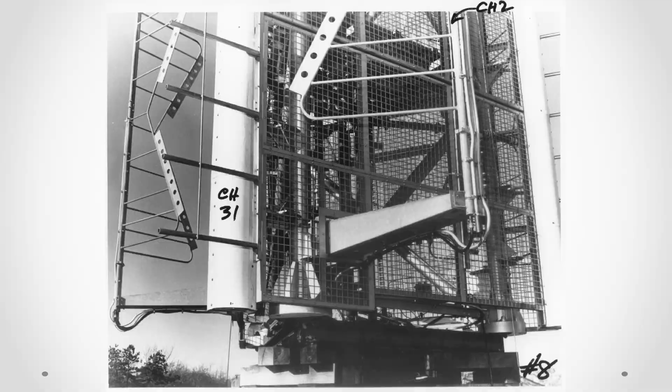These slides, some of them are courtesy of Alan Reese from the Port Authority and also Doug Long of WNJU from the original facility. So they're not in any specific order, other than lifting up a 20-yard container to the rooftop in the first shot here. This is just some of the antennas that were up there, to let you know what was there before and what we're adding now.

Just different pieces of the spire going up from the rooftop, which was an elevated rooftop, with all of the antennas in the left-hand photo. On the bottom there are two-way radio antennas. On the new facility, we have 3 rings wrapping around the top of the building that those antennas are on, as opposed to being on the flat deck of the building.

Again, just different sections of the superstructure being put up as it was built, lifting it from the street. The sections today were lifted the same way from the street with tower derricks and brought up to the rooftop and then set.

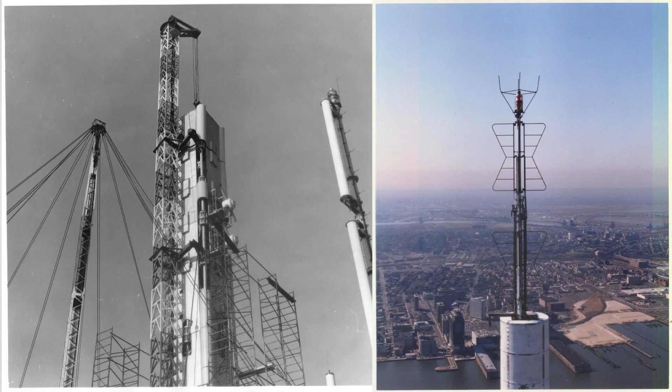The top then and the top now look a little different. Back then there was just a bow tie antenna for the VHF channels 4 and 5, and the rest were panels for the UHF antennas, with the FM in the middle.

There's your high anxiety shot looking down from the top. As I said earlier, the two-way radio antennas are all here on the roof.

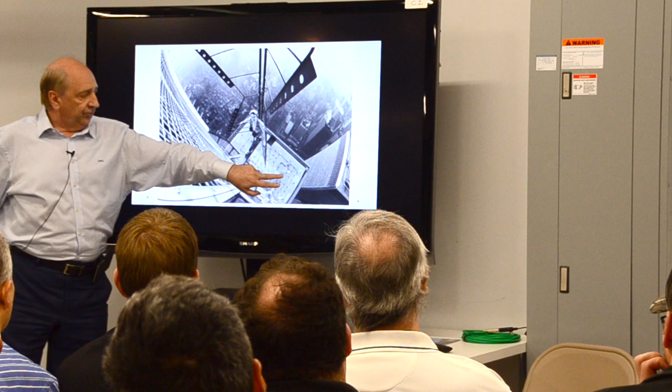This was a CNN ENG dish that I actually put in way back when, but this is what it looked like then.

Tower 2 is over here, and if you're walking around the Memorial Park where the two pools are, those were the actual footprints of Tower 1 and Tower 2. So we are just north of the original Tower 1 in this area now.

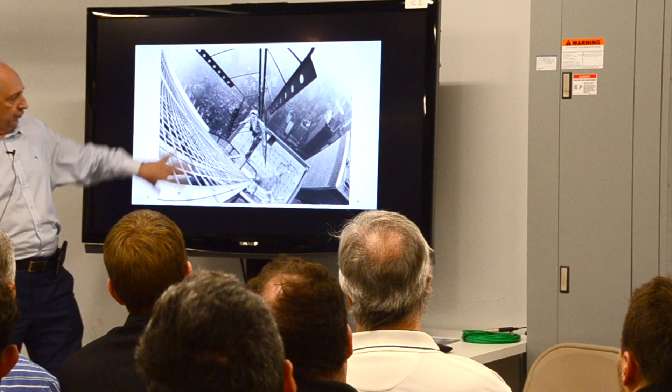And that's a picture you probably won't see today, of any riggers walking around in a tree climbing belt, not secured to anything, smoking a cigarette, and just hanging outside the building basically. The rules have changed a little bit in the last 40 years.

These I took right about 9 months before that day, 16 years ago. The ENG antennas and stuff wrapped the bottom of the spire, and the standby antennas were low, the FM was in the middle, and the primary antennas were up on the top. The ENG, the two-way, and the point-to-point microwave were all wrapped around the middle.

All of this ancillary service now is on the 3 rings, so if you look at the building from outside, you'll see those 3 rings. Unfortunately, with it being dark and late, and construction on the roof, we can't go up there, but you look at the pictures and you go, okay fine, that's nice, you've got these 3 little rings.

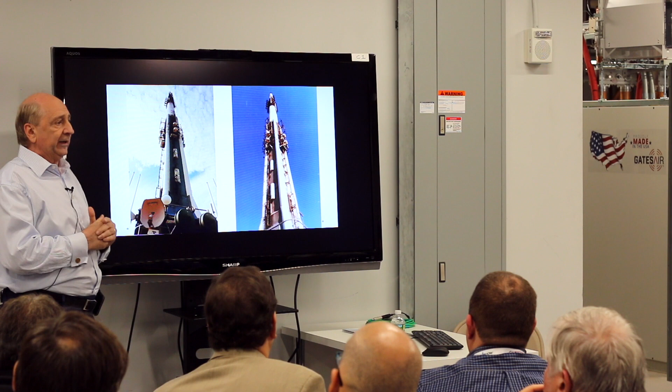Well, those 3 little rings are 750 tons of steel, sitting there on top of the rooftop of a building. So yes, it's a building, but still a building. And the new spire itself is 781 tons, also sitting on the rooftop of a building. So just put that in perspective when you look from the ground as to what you're seeing.

And that's what was left of the area, about 120 foot up the tower, after what happened. That was the hatchway, this was the RF safety shield, and that's what you climb through, getting up into the apertures.

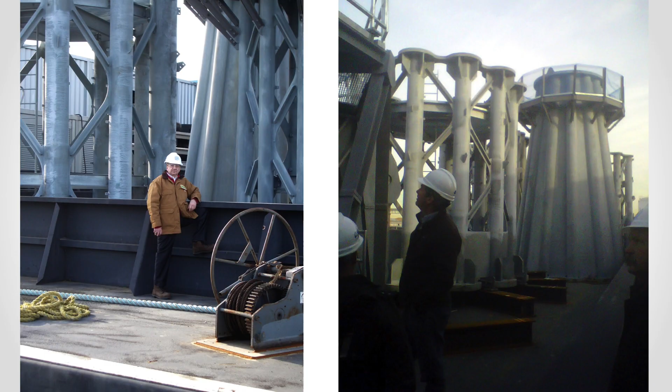So getting started down here, the tower sections, the bottom 9 sections were shipped from Canada by barge down the Erie Canal and down into the Hudson River.

They were then brought over by barge to the building. The top sections came by truck, and they were brought to the site.

So this is the property manager of One World Trade Center and myself on the barge in the laydown yard when they first arrived. Here they are coming across the river as they pass the Statue of Liberty from New Jersey, where they were anchored, and then subsequently coming towards the building.

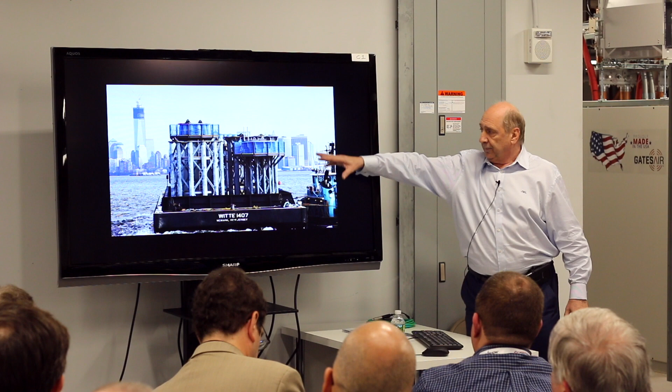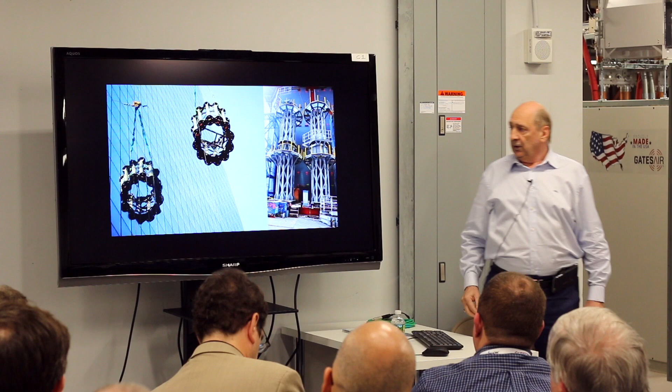As I said, these were brought up in pieces, one at a time, to the top, and then brought up and anchored. The upper sections were married, 2 sections on the ground, and then hoisted in pairs, because they were obviously considerably lighter than the lower sections, and they could handle picking them up.

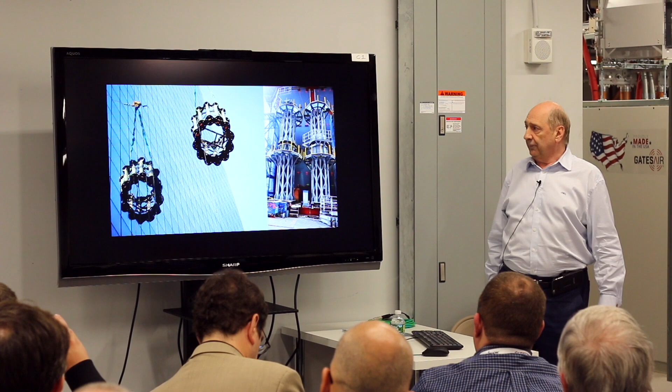If my memory is correct, the 2 tower derricks were 120-ton capacity each, so they had a good lifting capability to lift this stuff to the rooftop.

On the top section, they put the flag on. If you're looking now at the top section, the prism section is still live, this is still there, but this crow's nest has been removed.

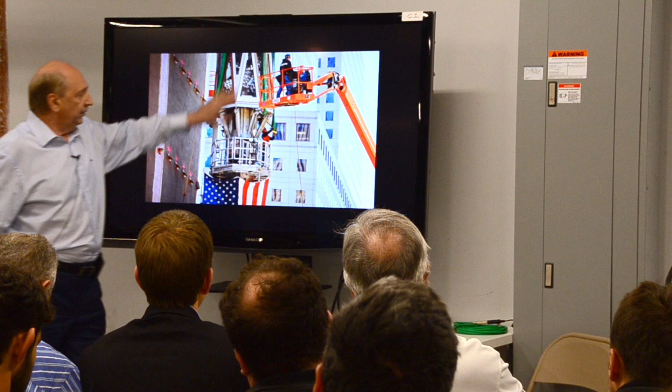The top UHF antenna actually goes up to just about here, so we had to remove this section to put it in, to get the top elements of that antenna in.

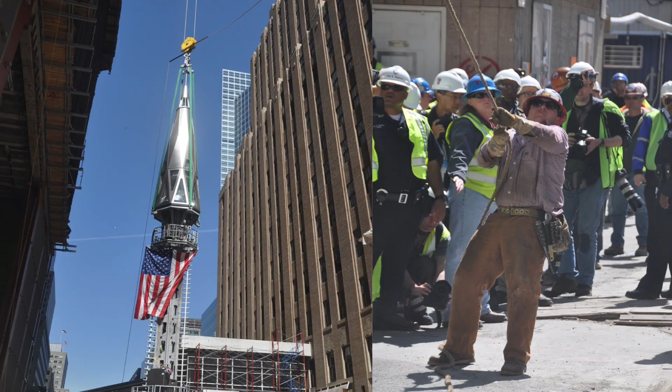And there's the top section going up with the intermediate section below it. All those pegs, those climbing ladder sections, have all been removed. That's all antennas now, and the climbing ladder is integral to the antenna. It's about this wide compared to those 24-inch wide climbing cells.

I put this in there because this guy was dealing with the tag line, keeping that aligned. You'll notice all his coworkers standing around doing absolutely nothing. This poor guy was on that line for 1,368 feet until they got that section up to the rooftop before he let go of that line. So I have to honor him for that diligence in doing it.

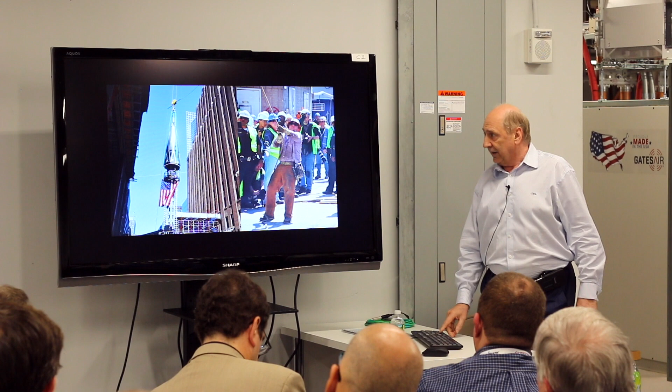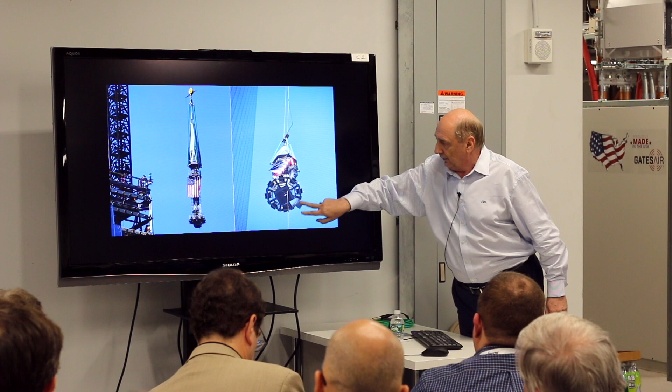As we go up again, this ice shield, as I said, this crow's nest here has been removed. This one's been removed too. These are lights that were put onto the structure before it was lifted, so it could all go up as a unit. And there we go as we're climbing to the top. The building was still under construction when the section was finished up.

And that was brought up May of 2013, so it's almost 4.5 years ago now.

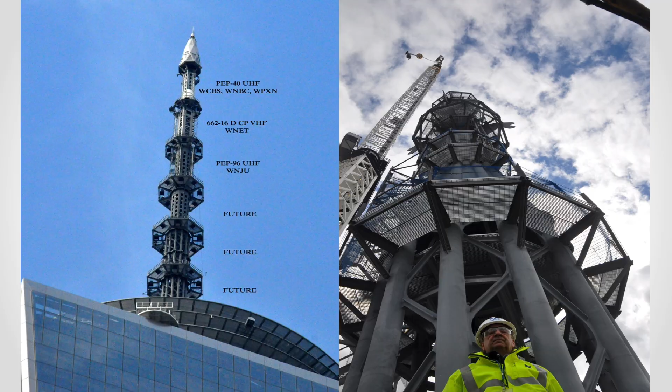This is perspective. I'm standing on this ice shield at this point, as they were building it. These are the stations that are up there now. We've also now added WWOR, and on this antenna we're going to have WNYW. The two Fox stations have now joined this group of stations. So this was as the antennas were going up.

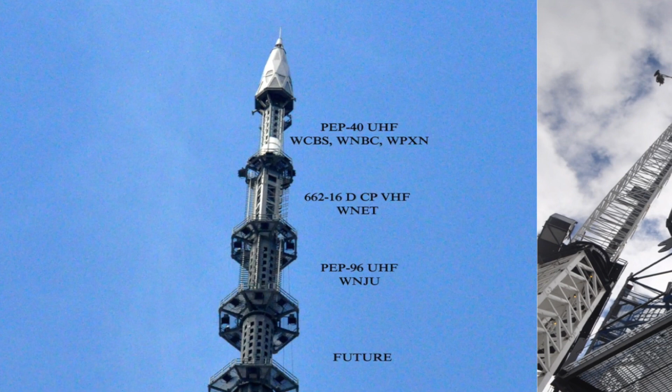There's the first antenna panels going up on the UHF up here, and you can see in this shot the crow's nest is gone. So we laid this out because WNJU and CBS are both very high power, so I'm spreading the load over the two antennas, and then the composite of the other stations balances them out. So I'm essentially putting out the same signal on the two UHF antennas, and the VHF is in the middle, which has Public Broadcasting Channel 13 on it.

These will all be changed. This is for future antennas. There's some later pictures that show a bit more structure, but everything was lifted piecemeal. All these antenna panels were lifted one at a time. These were lifted as 2 by 3 foot panel sections to make up the 96 that are here. There's 40 panels here, and there's 16 panels in the VHF.

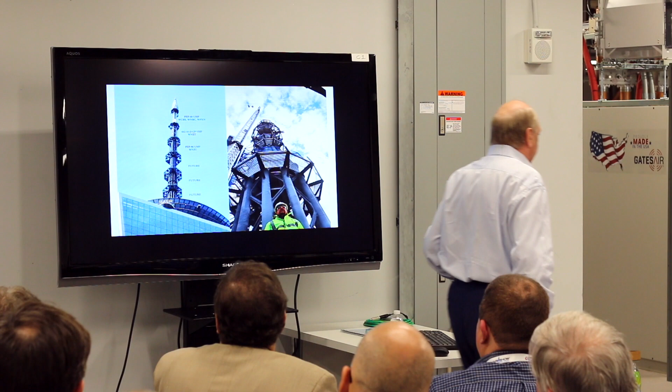These are the 3 rings I was talking about on top of the building, and they're about 250 tons apiece of steel that will have ENG, electronic news gathering antennas, two-way radio antennas, microwave point-to-point antennas, and beauty cameras for the television people who have the beauty camera shot in the back of their newscasts -- all will be on these rings. This one right here is actually a camera looking down the skin of the building, one of two that Legends, the observatory, has.

They have an indoor area with a glass floor that you can walk on, but it feels like you're outside because it's actually projecting that camera shot underneath your feet. So you're totally safe, but you have a big, about 15-foot diameter circle you're standing on, and you're standing outside the building.

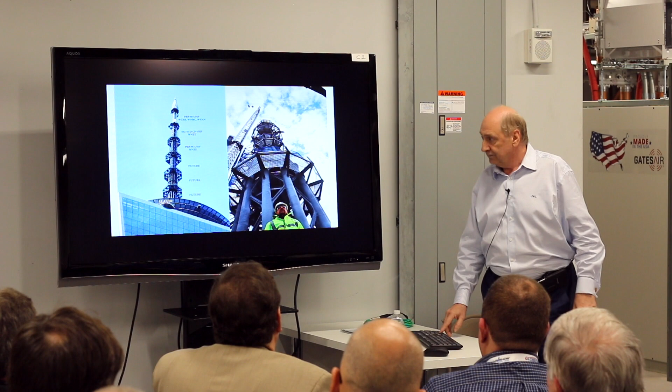This is in here just for some background. We did a test antenna in 2015 for the TV broadcasters. They wanted to see what the signal actually looked like from this building as opposed to what was coming from the Empire State Building. They wanted to be certain they didn't lose any coverage immediately in the near field area below the building, and they wanted to make sure that what they got going north above Empire was equal to or better than.

So we actually put a single face of antenna panels up, a UHF and a VHF, on top of each other, and this was the mount where the pole sat. There were two of them because they wanted to have it looking at Manhattan Grid North, which is the avenues in Manhattan -- for those of you not from here, that's actually 29 degrees off true north, but it's called Manhattan Grid North. So they wanted to go up that, and they wanted to be able to go plus or minus 30 degrees and see what the coverage was, so they could effectuate what the coverage was going to be in the areas of concern.

So we had the structural engineer design this gimbal mount, so the pole actually sat in there, and when they got it up there, they scored it every 15 degrees. So when the guys had to move it, all they had to do was go to the next notch, and they could land it, and they knew exactly where they were. And that's what it looked like from the other side. Just for a little background.

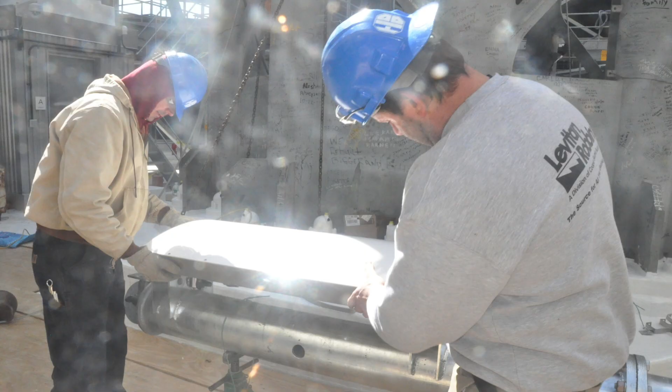There they are working on the first panels. As you can see there, it's a little bit cold up there. Just the one section -- this is the top antenna that was put up, the UHF, with a much oversized pole that was much heavier than what was needed, but they didn't know what they were going to be dealing with at the time.

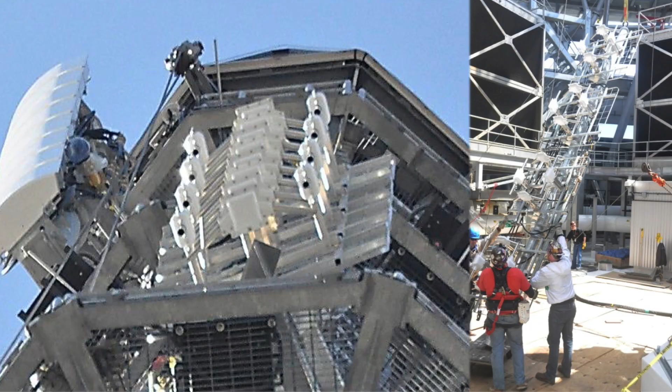These are the 2 test antennas up in place. The VHF is down here and the UHF is up there. This is the VHF panels going up, and as I said, we could orient them plus or minus 30 degrees so they could see what the coverage was in the marketplace.

The Metropolitan Television Alliance, the MTVA, did some measurements back about 5 years ago on a single frequency network to see what the coverage was. They had a test transmitter at 4 Times Square on one system and a test transmitter on the Empire State Building on the other system. They had all these points set up, GPS coordinated in their computer, and they could go out and measure those spots to see what the coverage was.

Since they had that database, they reused it and added another 100 points to test down here. So they already had established what was coming off the Empire State Building, what the single frequency network channels were projecting, and they could compare it to what was here.

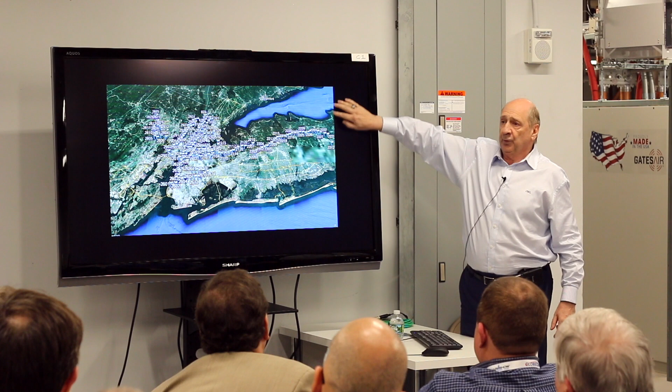This is mostly looking at Manhattan and northern Queens. This one is showing upper Manhattan, lower Westchester. They knew they had a null from the Empire State Building along the Long Island Expressway, so they added all of these points out to the radio horizon to see just how much null fill they actually were able to get.

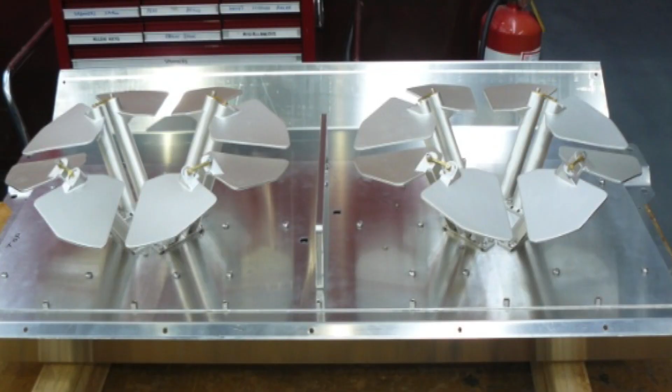This is what the UHF antenna panels look like inside. They're set at plus and minus 45 degrees to get an elliptical polarization, which essentially gives you a circular polarization when you're done. They're pre-calculated through the combiner to actually do the offset to bring them up to what the FCC would accept at 0 and 90, because these are plus or minus 45.

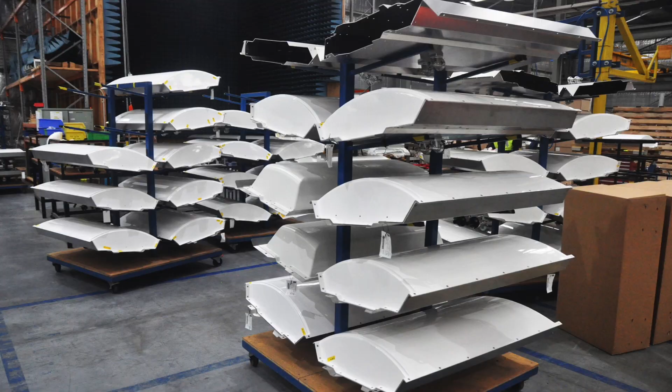That's what some of the panels look like in the assembly line. The radomes are actually manufactured for RFS in New Zealand and then shipped into Australia to be assembled.

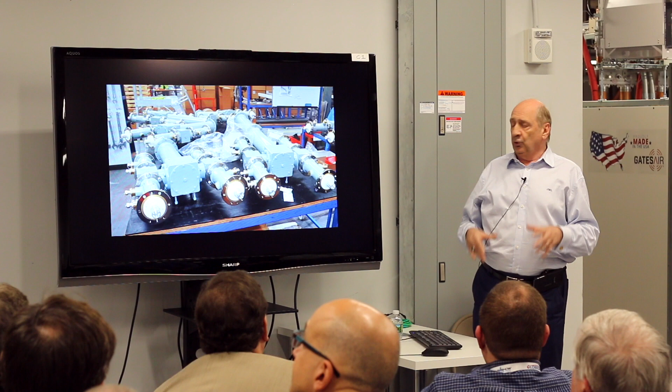Power dividers, we bring up the lines. As you can see, some of the transmission line over your head, and you'll see down at the combiner end, 2 8-inch lines, 2 7-inch lines, and 4 4-inch lines. The 8s and 7s feed the 2 UHF antennas, and the 4 4s feed the VHF antenna.

They then go up and power divide down and down into smaller lines, essentially hitting all the antenna panels, at 7/8-inch transmission lines. So going in size from 8 to 6 to 4 to 3 to 7/8, and any combinations depending on which antenna they're feeding.

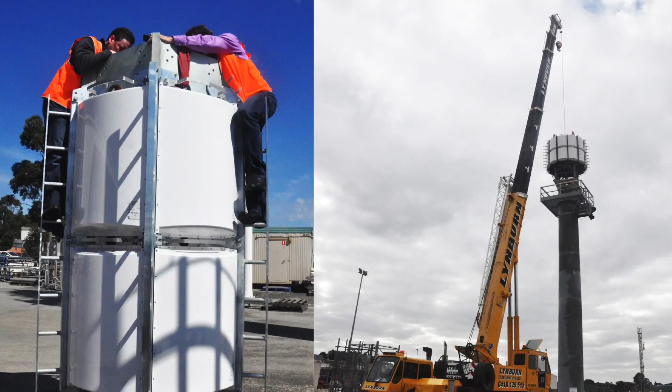On the test range, we did a 2-section of antenna. They're 8 sections high. That's the PEP 40, the upper UHF, and you can see the integral ladders in it. The PEP 96 is 12 around, that's 5 around, 8 high.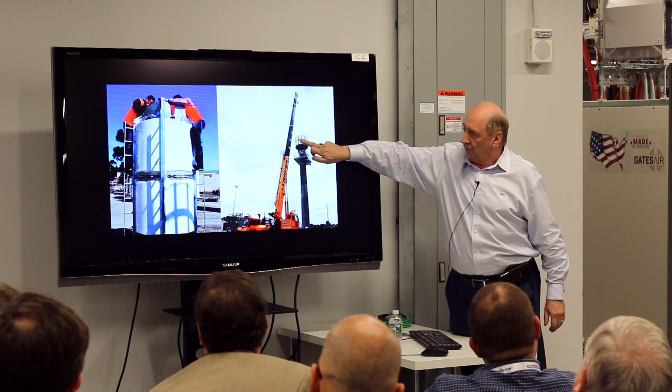This is 12 around, 8 high, and again you can see the ladder sections being built into the antenna. So all of those climbing pegs and everything that was put on the building had to be removed and retrofit before we could actually put up the antennas.

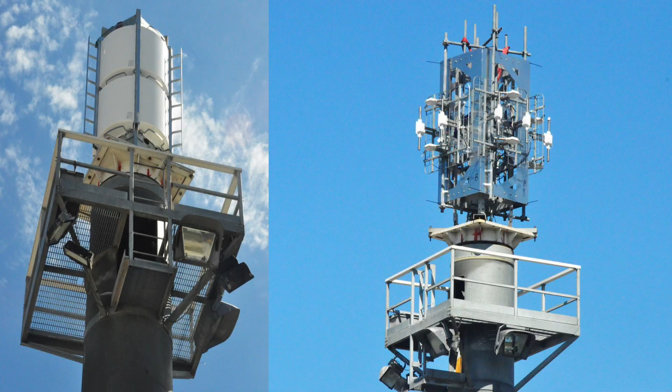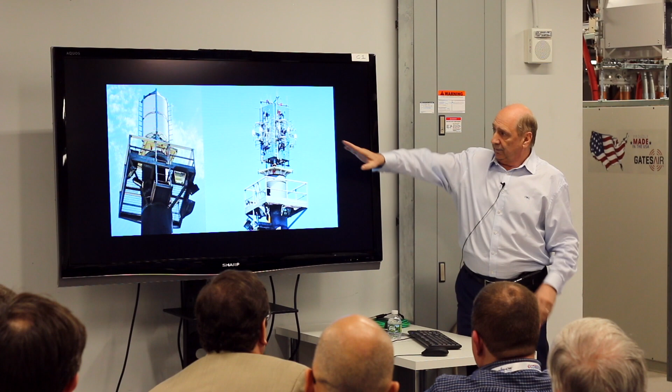Again, other pictures of the antennas on the range. The way they test these is they actually generate a signal from another antenna, and use these as receive antennas set in the field exactly within the aperture. This rotates on the base 360 degrees so they can see what the antenna is receiving, which correlates to what it would be transmitting. They did that with the upper UHF, the VHF, and then later on the lower UHF antenna.

We then got the whole team together: the guys from IAT, the guys from RFS, the guys from the electrical concern who put it together, and the structural engineer. We all went over all the drawings so everybody would know how this went together at the factory so we could reassemble it here.

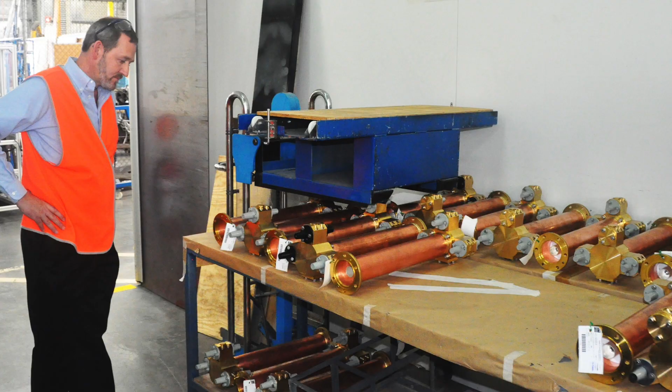Some of the fittings before they're coated with the gray paint used outside, and there's part of the motley crew that actually put this project together.

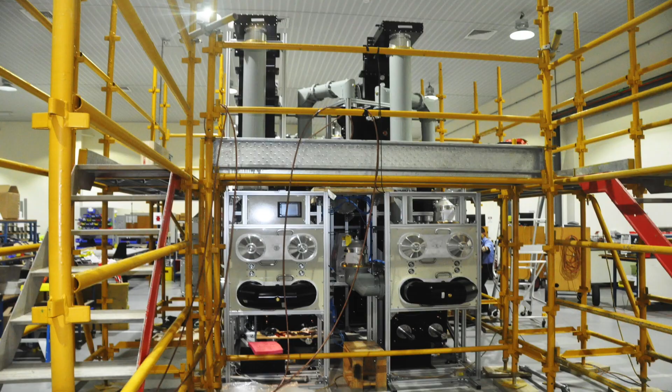RFS also manufactured the combiners. There are two combiners for UHF, plus 45 and minus 45, feeding one antenna, and the same feeding the other antenna. They are absolutely identical, except this one has 8-inch outputs, and the other goes from an 8 to a 7-inch output on the other lines. Other than that, the parts are totally interchangeable - they're mirror images of each other.

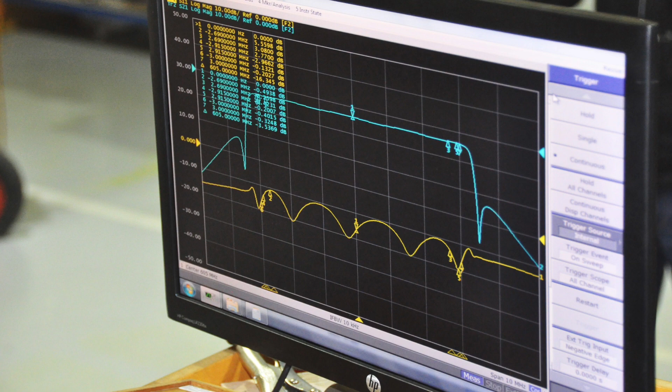That's what it looks like through the mask filter, with the 6 megahertz sharp cutoffs on it, showing any technical people that it's absolutely on channel - nothing extraneous going beyond what's allocated for any specific station.

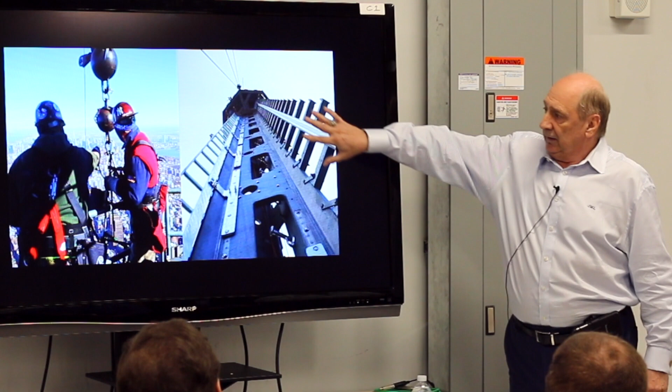So now moving back to here - as I said earlier, all these pegs were up there and had to be removed to put the antennas up. RFS designed adapter plates to go into the mounting holes originally put in the spire, utilizing what was already in place so the antenna panels just snugged right onto there.

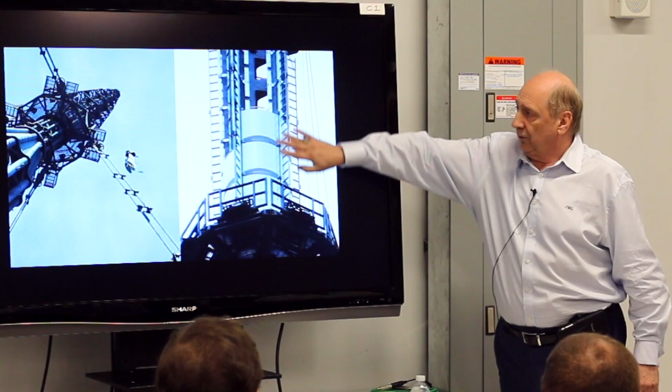Some of the first panels going up, and here you can see them being built. As I said, they went up about four at a time, then were put up one at a time, with connectors put on each one.

That's as we're getting close to the end. You can see part of that catwalk, or crow's nest, still there - they needed it for hoisting.

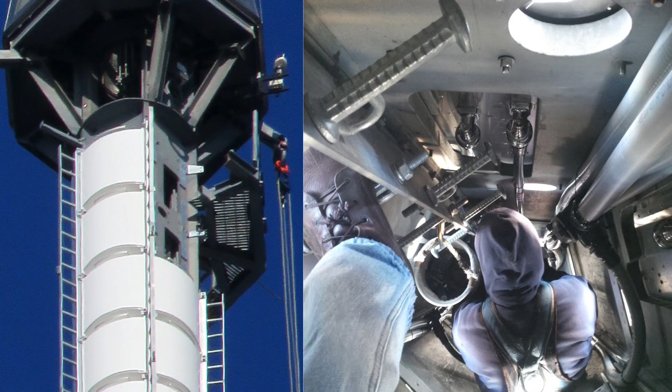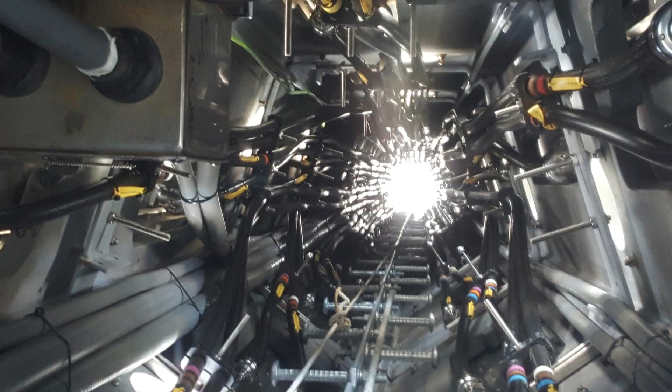This is the view inside. We put a set of climbing pegs also inside the tower. For those unfamiliar with towers, those pegs are about this wide, just enough to put your foot on, and that's it. There's a view with the cable looking down from the ladder.

All the cables were color-coded, so they knew exactly which one went where. They matched antenna to cable, so everything matched what was done at the factory.

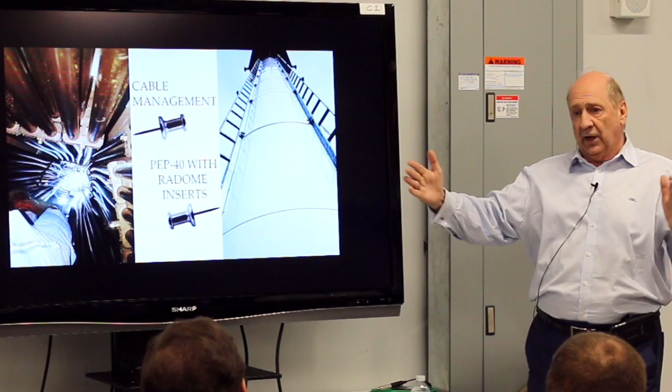Cable management inside - they actually made blocks so these lines go in, and you could stack them four across, as deep as you wanted, just by changing the threaded rods, or go out wider and put them in that way. So that's all interlaced up inside.

Here's the antenna, the top antenna, with the interstitial radomes between the panels, which act to make it one panel for the wind loading.

Again, sections going up - this is the power divider you saw in pieces from the plant. Here are the guys actually putting it in place. The other one is on the other face. This is feeding the top antenna, and there's another set lower down to feed the bottom antenna on opposite faces, with the VHF on the faces opposite that.

If you look up at the building and see funny looking things hanging there, you really can't see them from the street, but that's about 20 feet long. This is a 40-foot section.

And there's your typical wow shot from the top.

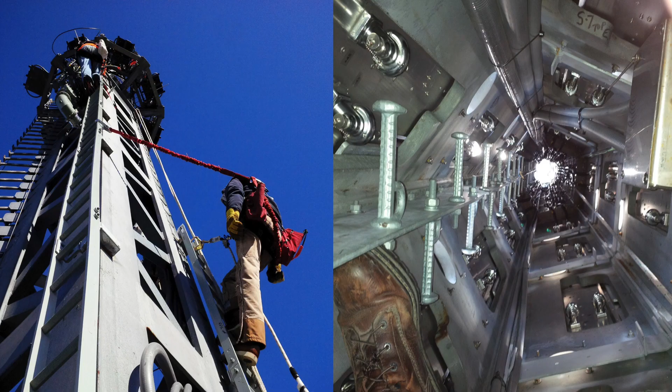Looking down through the grating, the transmission line going up - down here it's all copper, up here it's copper too, but it's been solar coated. Each antenna, the UHFs, has two lines going up.

We have to keep them in phase. By solar coating them, we don't get any effect from the solar radiation of the sun, so the thermal effect is minimized. We actually tested the two lines from pre-sunrise to post-sunset - cold air, the sun going up and down - and the solar coating kept the phase between the two lines less than a degree off over the whole day. So the solar coat is definitely effective at controlling any thermal effects of the sun on the lines.

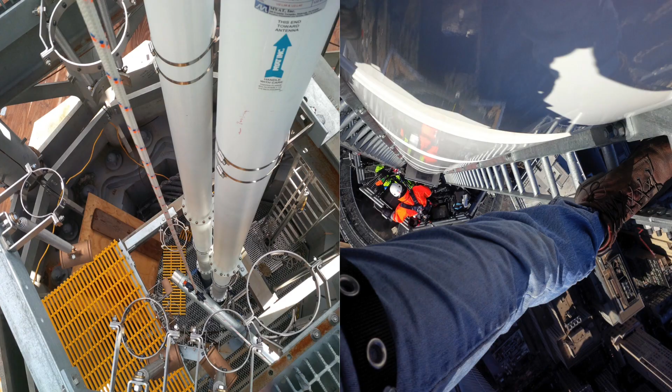And there's just another couple of views looking down from the perspective of the guys up there working.

On the rings, we have ENG antennas and STL antennas. These happen to be WNJU's from this station. They have 3 of these placed 120 degrees apart. NBC has 3 of them placed 120 degrees apart, 45 degrees off of these.

Two-way radio, GPS, and studio transmitter links are on the next ring down. The bottom ring we were originally not using for anything because that was the escape route for the window washers. We're changing out the window washing rig, so now that whole 3rd ring is open for me to populate.

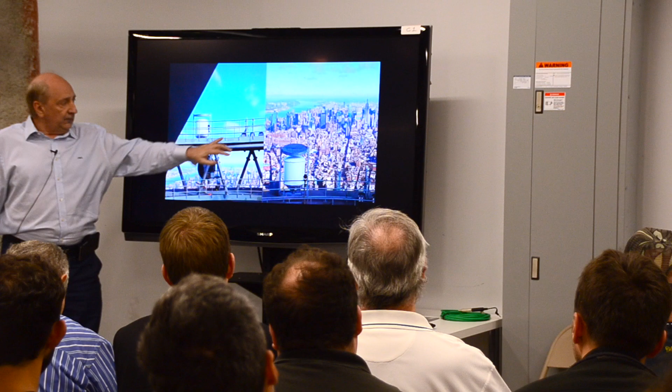GPS lower on this slide. Rather than have everybody put GPS antennas up, we actually have 4 GPS antennas on the 4 cardinal points, north, east, south, and west, feeding down to a room on the 104th floor where we have a distribution system to feed GPS to anybody who needs it coming off of those antennas.

They just plug in and pick it up as GPS via RF, or they can plug in and pick it up as fiber. We also have a rubidium backup, so we're generating a 10 megahertz clock up there. So if we lose a GPS signal, we still have clock being generated.

And Chris, through DSI, has put in the fiber between there and here. They did the GPS distribution system, and we actually brought it down. We have 6 bundles of 72 strands of fiber connecting 104 to 90.

That's internal to the building that other tenants and others have no access to. So every broadcaster has glass running back and forth. They can use that for whatever facilities they need to get from the rings to this floor.

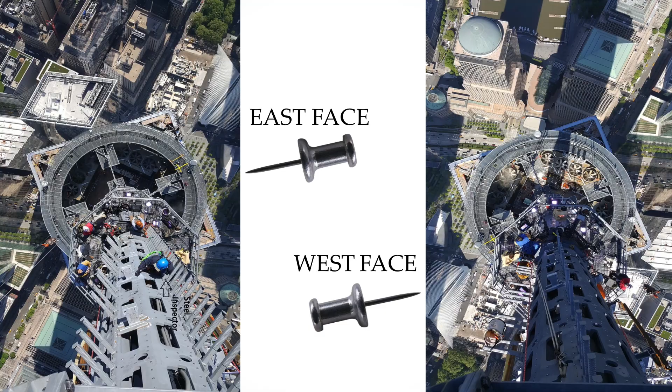These are just some views of the east face under construction, the west face, north, and south.

The Durst organization, who I work for, co-owns the building with the Port Authority. It's a joint venture. We are a very green company. 4 Times Square was the first building that actually set the gold LEED standard, before LEED became an official thing - that building kind of got it started. One Bryant Park, our main office, is the first commercial office tower that's platinum certified. So it's a family tradition, a family heritage.

We also have an organic farm upstate in New York. All of the tenants who have cafeterias subscribe to that - all their compost and waste goes to the farm. We also buy recycled paper and all that, and again, the tenants have all bought into that philosophy.

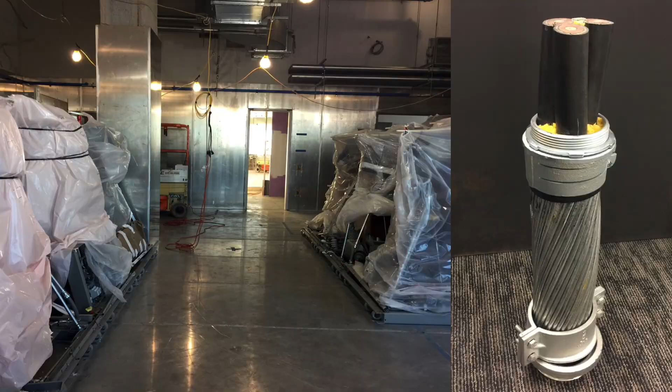Part of that effort was to bring the power up here in a useful, non-wasteful method. So with everything being 480, we didn't bring 480 up from the street - we brought it up at 13.8 kilovolts, and we're actually converting it to 480 on the floor. So that's a 13.8 feed. There are 2 of those, a primary and a backup feed coming up the building.

If we did it at 480, we'd have 20 of those in each riser closet to get the same power up here. We put a dual-ended substation up here. Those are the transformers as they're being built.

The floor is all EMF protected, so we don't have 60 hertz running all over the place coming out of there. That's the room across the hall.

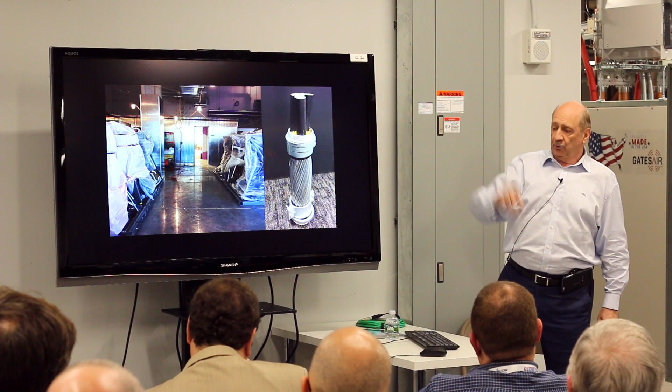I cannot show you that because it is 13.8 kilovolts, and the Port Authority has everybody who does not need to be in there locked out. Much better safe than sorry. That's the door across the hall.

I'm going to go around some of the other facilities being green.

This is what you're looking at behind here - these are the pumps from the combiner, which is on the other side of the floor. Gates has slightly different pumps in the CBS area over here, but essentially they're the same. They're pumping a glycol-water mix. They're doing 39% glycol, 61% water. The others are doing 50-50 - different philosophies in the two different companies, but essentially it's a glycol loop to help with the cooling.

Transmitters are all water cooled up here. We exhaust the heat through brazed plate heat exchangers here on the floor that go up to the 103rd floor, where they hit another set of plate exchangers that go up to the cooling towers. So the primary loop is an open water loop that exhausts the heat into the air, goes to the 103rd floor, which is in a closed loop from 103 to here, and then we go to the heat exchangers with the broadcasters, then from the plate exchangers to the transmitter and the pumps. The only area that is glycol is down here on the floor.

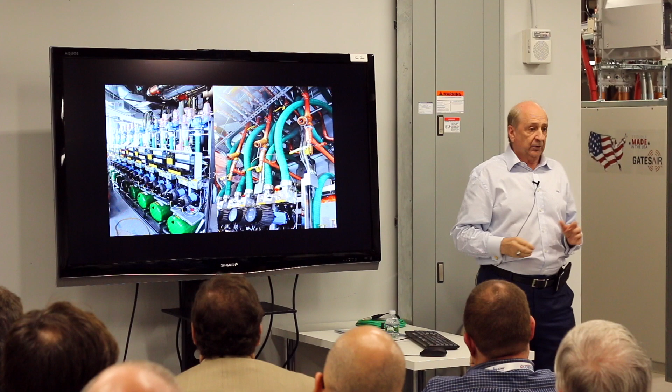Just some of the pumps as they were being set up. What we also did above the top, you'll see some green flashing lights if you look up above the transmitters on the active ones. We have energy valves on it. These modulate the water. We keep the delta from inlet to outlet temperature at 10 degrees so that we're not wasting water up on top. We're supplying what's needed, no more, no less.

Also, the pumps, both the ones I just showed you and these, are modulating pumps. So if we're at, say, 9.5 degrees and they really want 10 degrees, these will ramp up a little bit to get that 10-degree delta. So we're really being energy efficient with the use of the water in the building.

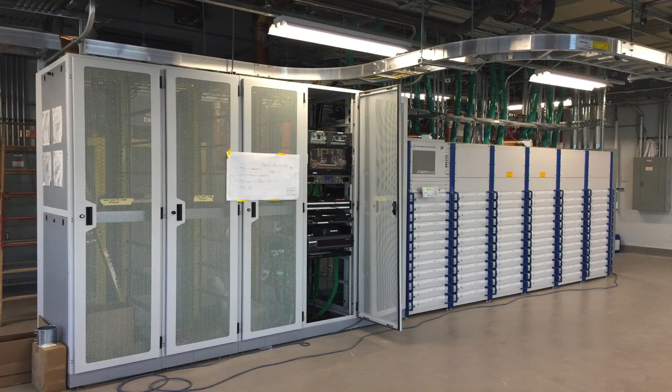This is what's behind you as they were building it. This is WNJU. Before they went on the air, they were still building at that time.

As I said, this transmitter is on the air. It's been on the air since June 23rd. It's running to the top antenna, which is live at 67 kilowatts. When they move to their main antenna, the bottom one, when it's finished later this year, it'll be running, I believe, licensed power of 97 kilowatts. Richard on CBS is going to be running about 80 kilowatts, I think, licensed transmitter power. That's not effective radiated power.

And again, being water cooled, the noise level is going to be like this. For those of you in broadcasting, especially from years ago, we could not be having this conversation now in this environment, because the noise would be worse than a jackhammer, by about 20 decibels, compared to the air-cooled transmitters. Water-cooled has definitely made a considerable difference to both everybody's hearing and the work environment.

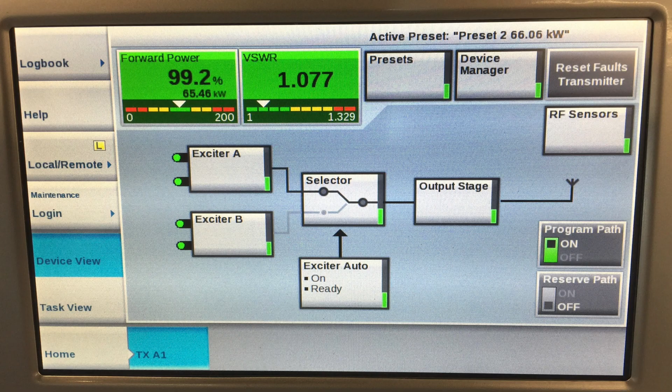This was as we were testing this transmitter. They were running at that point 65.46 kilowatts, 99% power. And this is just a screen of the control in there.

They ship all their line in boxes. I didn't want boxes manufactured 30 miles away brought here and discarded, whether into a landfill or recycled. So we did a program with them: the truck came in with the lines, the next truck that brought the next load in brought the empty boxes back, and we recycled the boxes until they were really unusable, and then they were discarded through our recycling place, which picked them up. They didn't go to a landfill. This cardboard was recycled.

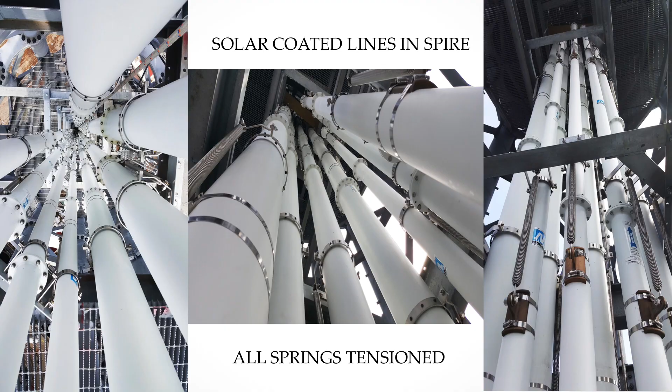I talked about the solar coating in the spire. This is a shot later on when all 8 lines were in, and all the springs were then tensioned. For those not in the broadcasting arena, copper, 300 to 400 feet of it, moves about plus or minus 1.5 inches depending on summer or winter in the city of New York. So everything is on springs. They're fixed hangers, top and bottom, with springs in the middle.

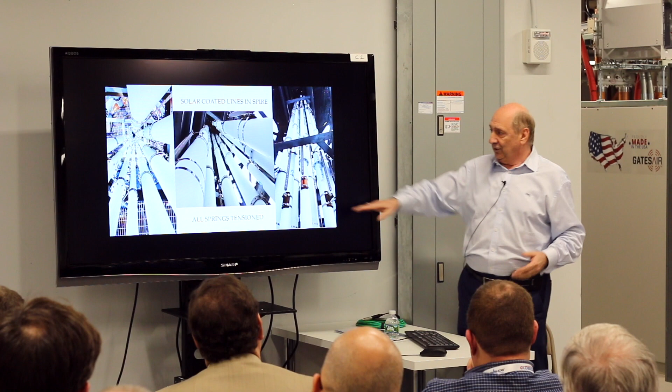The springs are tensioned to the temperature in the environment on the day they're put in. If it's 65 degrees, the spring may be tensioned 15 inches. If it's 85 degrees, the spring may be tensioned 12 inches. Based on the tension on the day they were put in, overall, depending on whatever the temperature is, the springs are tensioned properly, and they'll all move together, because the last thing you want is things splitting, O-rings opening up, or whatever.

Being the World Trade Center, with security issues and everything else, trucking logistics was very important. As I said before, the antennas came from Australia, the combiners came from Australia. They were air-shipped, which meant they had to be laid horizontal to fit in the cargo hold of an aircraft.

Coming into the building, you came up in one of the elevators, and they're vertical, not horizontal. Everything went out to Myriad and was restaged. Some of the stuff was left the way it was and just stood up. Others couldn't be. The plant in Australia actually took all this into consideration, and they told them, okay, you remove this board, this board, this board, you have to stand it this way, you can't stand it that way, just to deal with the logistics, which was a nightmare.

Shipping, security, and everything else: the trucks, anything coming into this building, the drivers have to be identified in advance, and the VIN numbers of the vehicles have to be in the system. If they don't match, you don't get in. That's simple.

Broadcasters will have a trusted worker program so that they'll be identified, with security worker access scanned ahead of time so we know who they are. All the secure areas have biometric readers and swipe cards. You need both, so if somebody cuts off the finger that's in the scan, you're not getting in.

Everything was 3D rendered, the whole job, so that we can make sure - as you can see, I've got 23 vertical feet above me, well, 17 above me. Everything had to be in proper layers so that everything could pass each other.

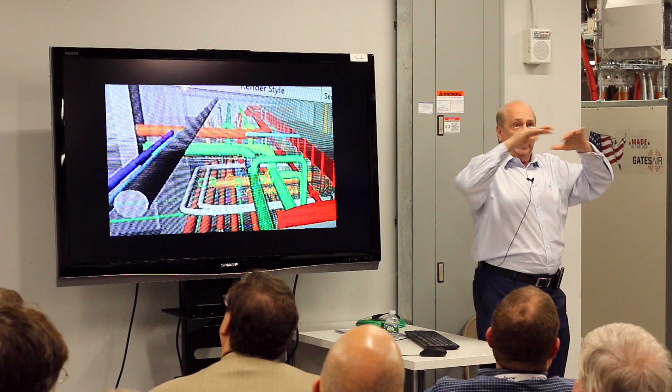So the water is all at the same height. The electric feeds, including the 13.8, which is identified, are at the same height. All the transmission line going across the floor will be at the same height. All the duct work - again, everything had to be layered in to make sure it would all work.

Having a 23-foot ceiling in here was what made this able to function. If it was a normal height ceiling, doing this would be an absolutely impossible task. So we had an architectural firm do all the 3D modeling.

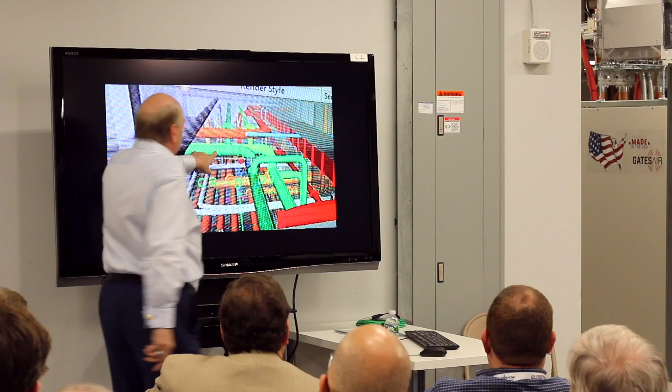You can actually see in this shot there was a hit right here. We had this water pipe hitting this line. We had this pipe smacking into that line. That's why everything was done in color, so they could see where the hits were and do all the adjustment.

And that definitely helped in the hallway, because we have input lines from the transmitters to the combiner in some cases, and output lines going back into the hallway and into the shaft to go upstairs. So there's the modeling of that.

The upper lines are the two lines you actually see over Kirk's head there. Two other lines in the wall there going to the combiner down the hallway, and the 8 lines coming from the combiners going back in the hallway to the shaft.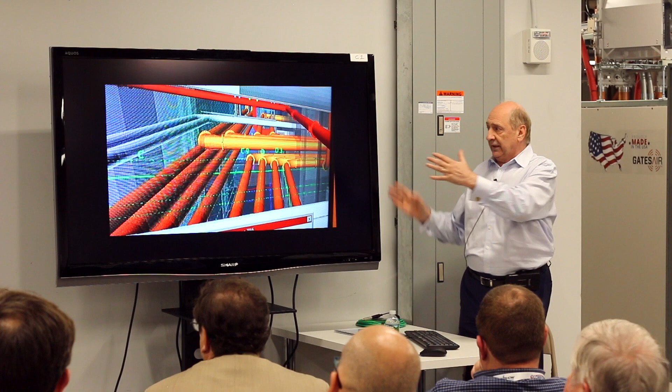In the next shot, I had to turn it 90 degrees to fit it in, but remember what you're seeing here, and there it is in reality.

So just to make everything fit, and also to make sure - for those of you in broadcasting who have worked in tight spaces or in the original Trade Center, as Harold can attest to, lines were put in smack together right next to each other. If you had the line in the rear that had to get out, everything in front of it had to go. We made sure there's spacing to remove every single piece without affecting the adjacent hardware to it.

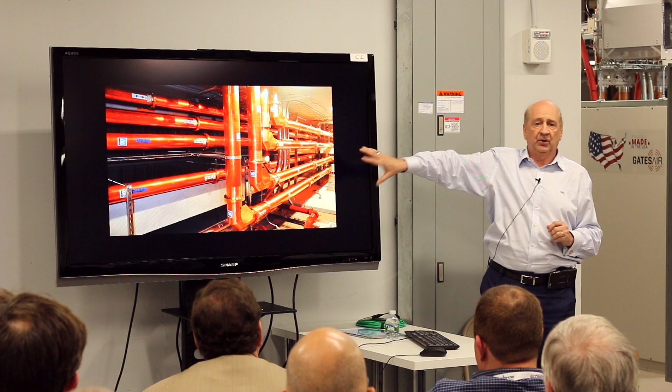This is the 7-inch line going up to the upper antenna. This is the standing wave ratio - 1.2 to 1 is acceptable, kind of on the outside. Nothing here is worse than a 1.1, and that's only a couple of places.

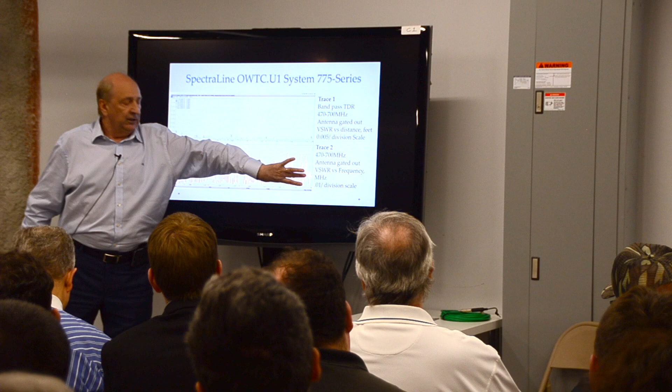And this is actually the band that's going away when the repack takes place. Everybody's moving down to below 600 megahertz. So these little components that are actually here at just about a 1.1 will go away, and we only have a hit of 1.08 VSWR here, which is spectacular.

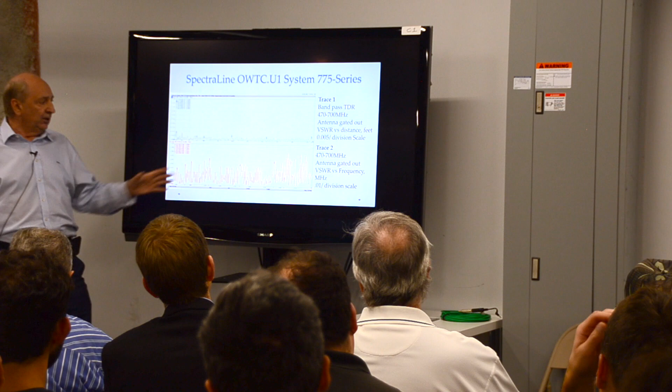Transmission line in itself is a 1.03, can't be lower than that for this size line. So the fact that the entire system going up to the antenna proves that everybody did their job and did it right. That's one line of the 7-inch, and there's the other one.

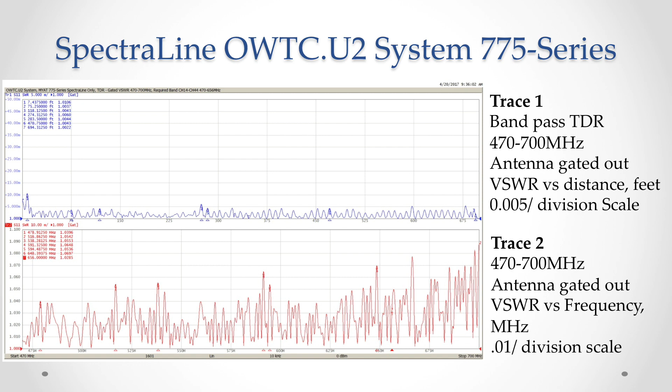So you can see they're both very, very close. Again, the outer band components over here.

Logistics: elevators were measured, crating had to be done properly to get it into the building. They actually took these antennas for the lower UHF antenna - we wanted them put up in 3x2s, otherwise it would have been 96 picks. Doing it this way, we had 16. It was still 16 times we had to hoist equipment up.

So they actually made a mock-up of this and fit it through the corridors and the walkways and into the elevator, to make sure they could actually get it on the roof and under the diagonal steel to get it up there. A lot of logistics went into making this work.

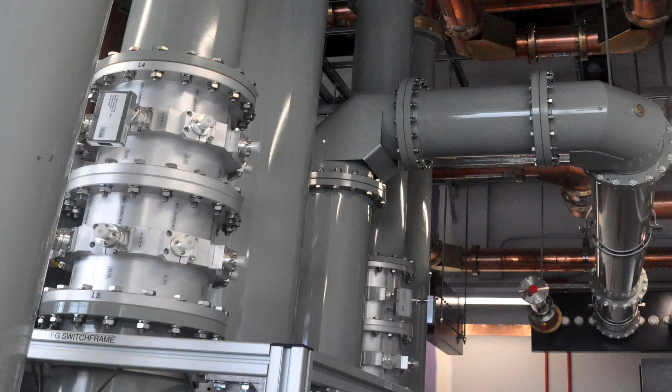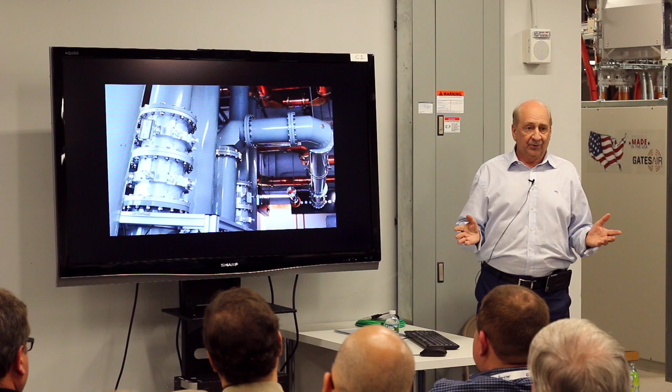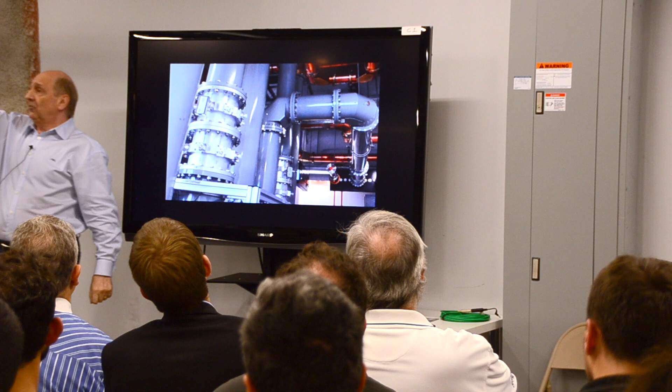This is by the combiner section. Again, we're just dealing with RFS. I wanted the broadcasters to be able to get their own forward and reflected powers off the equipment, not being generated by me, where somebody could say, well, you fudged the numbers. They've got a home run raw feed right off a forward and reflected port, right at a combiner. Each station has their own pair. They take their own feed. The cable's running on the ladder rack. The black cable over my head going in there is their feed from those combiners to their equipment going back to their studio. So I have no control over it. They're seeing exactly what the system is putting out without it going through anybody else changing it, critiquing it, adjusting it.

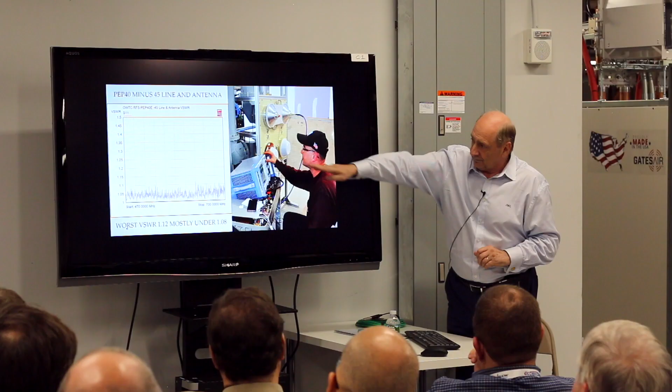Up on the tower, we were fortunate to have Todd Loney here doing a lot of the testing for us for RFS, and they were also hired by WNJU to do their system testing. This is at the antenna input on the tower going into the antenna. Again, the standing wave across the entire UHF spectrum has a highest point of 1.08. That's antenna only. Input to the combiner, that's what it looks like. Again, the upper part of the band is going to be gone. The actual part of the repack band, the highest VSWR there is 1.08 across the entire system.

This is one of the antennas when they got it onto the roof. You can see they had to put wheels under it, change the packing, and use a hoist to get this stuff under. That diagonal beam we could not remove. They had to get past that with everything. The elevator is about where I'm standing. So everything was based on that diagonal brace to get it past there.

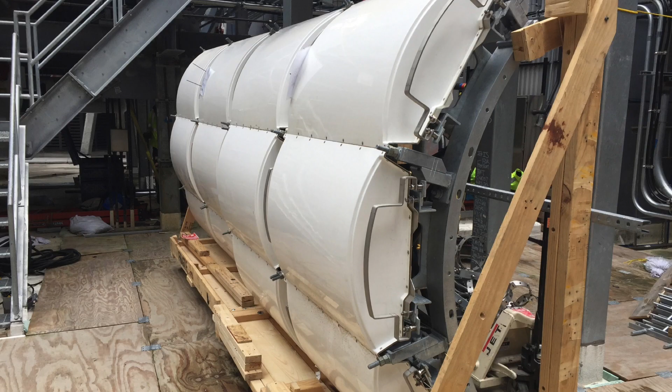And that's what it looks like. Originally they were planning on trying to pick a face at a time, the whole 32, or 8 times 2, 16 panels at a time, but they decided that it was too much wind load and it was easier to pick them up, mount them up, get the mounts up and just attach them. So it was more picks, but more efficient.

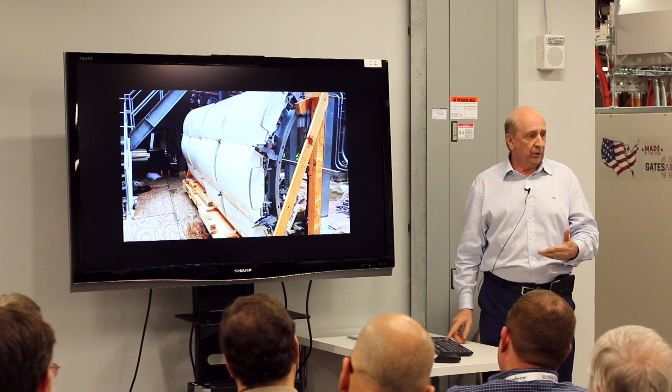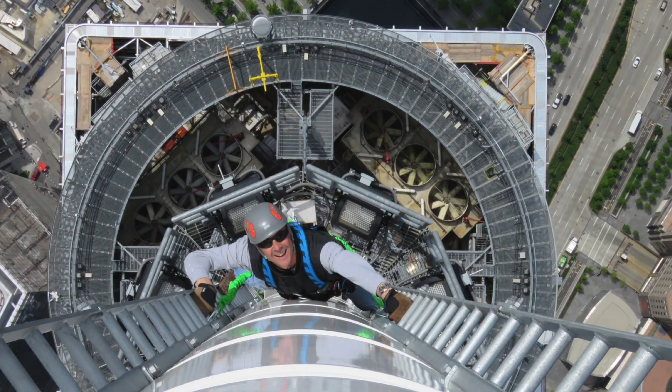My project manager from Tishman, Pat Keating, elite certified Marine, worked in Desert Shield, Desert Storm, did construction over in Iraq. Jim Graff, a lot of you know, master rigger, old timer. I've been doing this for a long time. I brought him out of retirement to finish this job, which he fights me on every day, but he's still here working. And there's Pat on the spire. Pat did a lot of the pictures up on top. I think he's past his 51st climb now. He never climbed before, went to climbing school, full protection, all the training, and he's my eyes in the sky.